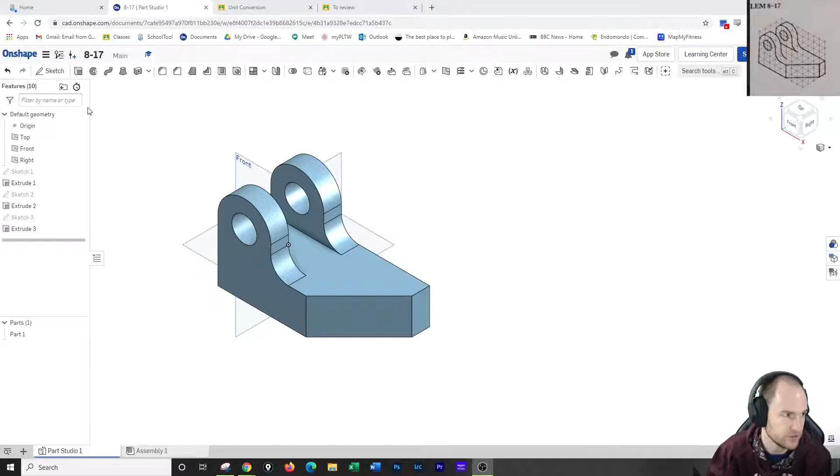Alright, so we're going to be drawing this guy, problem 8-17 in Onshape. So I'll just start by making a new Onshape document. This will be 8-17. And I'm going to do this in 3 extrusions. I'm going to start the first extrusion here. This is the most complicated one.

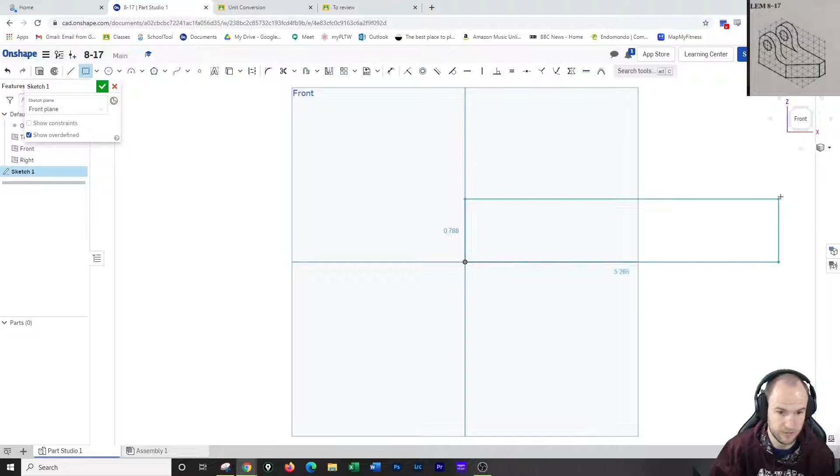And I'm going to be doing this based on the front view, which is going to be 1, 2, 3, 4, 5, 6, 7, 8. So looking up at that box, I've got an 8 by 2 section. If I'm looking at it here, so here it is. I got 1, 2, 3, 4, 5, 6, 7, 8. So that's an 8 by 2 section. So that's the part I drew.

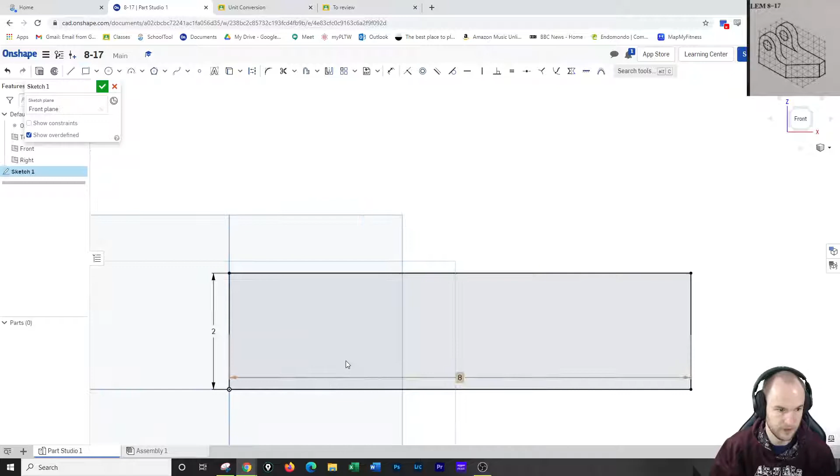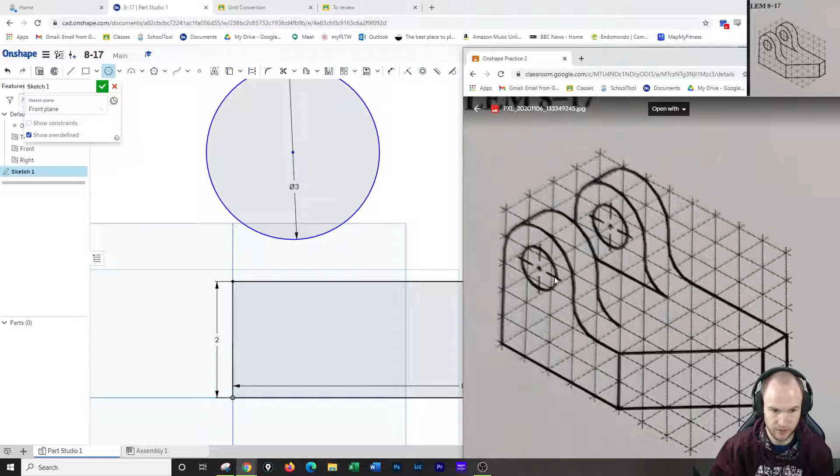The next step is I'm going to draw a circle with a 3-inch diameter. So here's my circle, and the diameter, if you look across the middle, is 1, 2, 3. So that's my 3-inch diameter. And it's going to be centered 1.5 up and 1.5 over from the edge. So when I go to dimension this, it's going to be 1.5 up, and it's going to be 1.5 over.

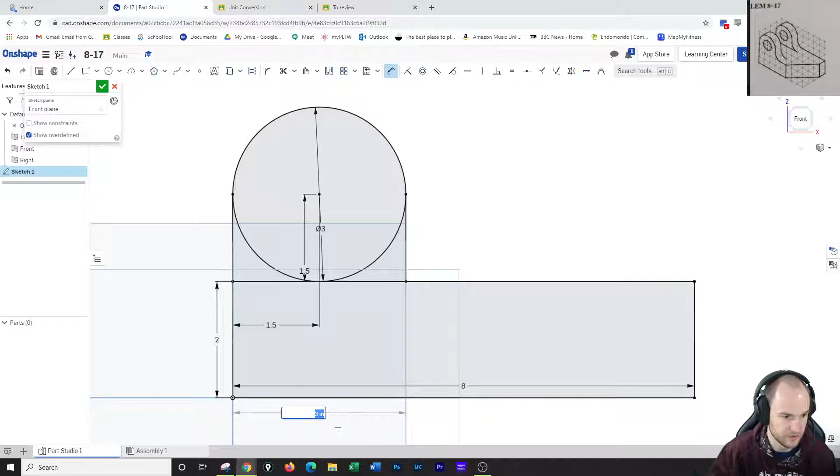I'm then going to take the line tool, and I'm going to grab onto the side of the circle and go straight down. And I'm going to do that on the other side as well. I'm going to go straight down. These lines should both be vertical, so making sure they're vertical with a vertical constraint. And these lines should be 3 inches apart. So I'm going to dimension them, make sure that they are 3 inches apart, which they are, so that's good.

Upon getting that, I can go in and I can trim the bottom of this circle out. So I use the trim tool for that. Oops, took out the top line. So I trimmed out the bottom of the circle, and now I have like a dome. And I am going to draw a circle in the middle. And actually, to figure out the dimension of this circle in the middle is kind of tricky. So it's not to any specific point, but it is hitting the corner of each of those squares.

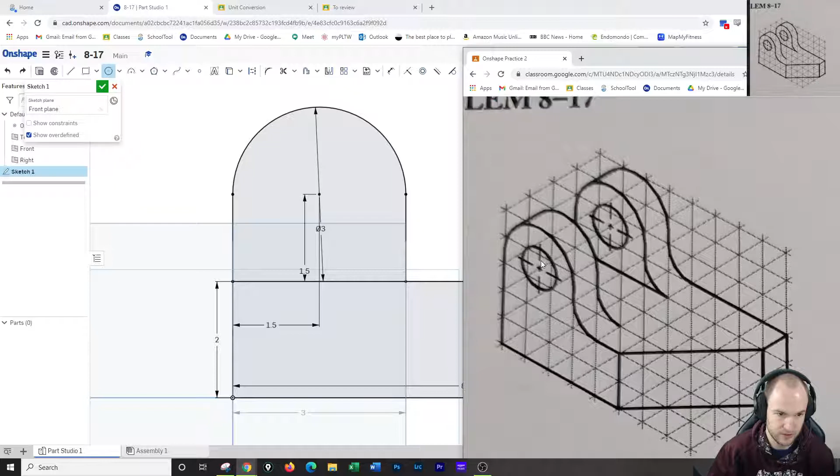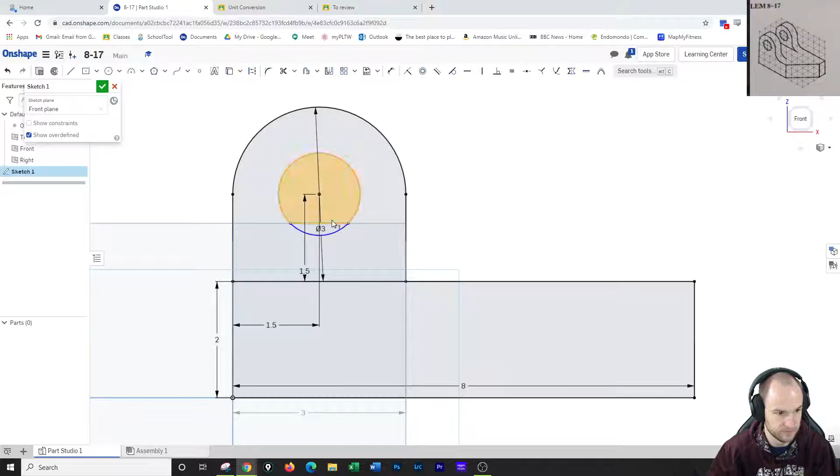So I can actually kind of cheat, and I can draw this 1 by 1 square and then draw the circle based on that. So to figure out the dimensions of this circle, I'm going to use a center point rectangle and make a 1 by 1 rectangle. And then I can make this circle and just drag it out till it hits one of the corners of the rectangle. And that will give me the dimension required for the circle. I can go in and delete the sacrificial rectangle here. And there we go. And the dimension of the circle is like 1.4 something. 1.414214. So that is there.

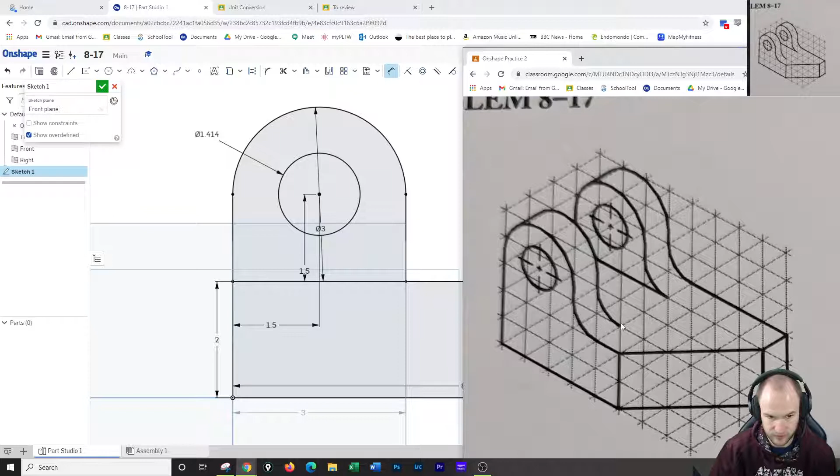The next thing I have to do, if I'm looking at this, is add this fillet here. So this fillet's got a radius of 1 whole block. It looks like if we kept going, it would go to 2 blocks and would make a circle here. So we got a fillet of 1 whole block. So I'm going to go in here. I'm going to use the sketch fillet. I could do this later, but I'm going to do it now. And between here and here is going to have a radius of 1. So that's good. Hit enter. And we've got our fillet in there.

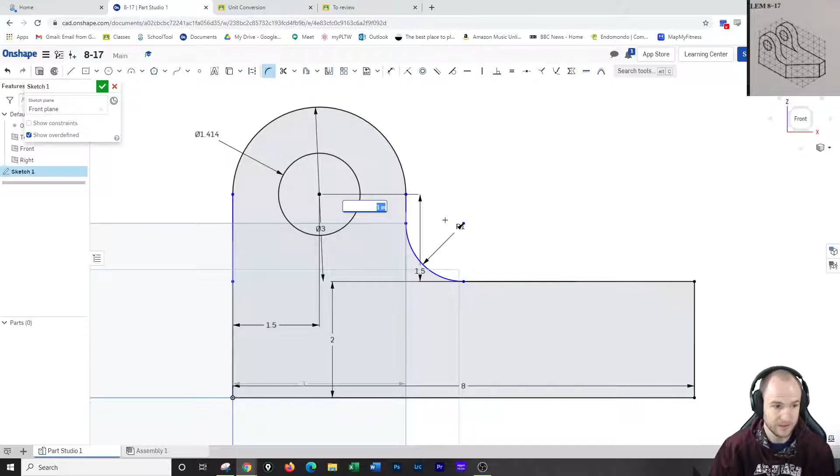And that's all I can do for this front sketch, so I'm going to hit finish sketch. I've already counted out how far I wish to extrude this. I wish to extrude it 4 inches, so I just want this section, leave the circle out, and it's going to extrude 4 inches. Like so.

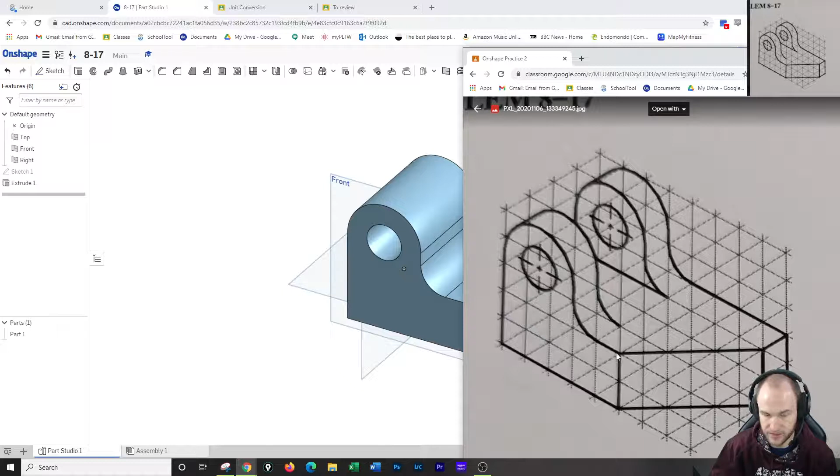Very good. The next part, I'm going to cut out the triangle portion here. And the triangle portion is 1 from this edge and 5 from this back edge. So that's where I'm getting my dimensions from. So I'm going to go to sketch, grab that top edge there, and I'm going to be sketching from here to here, and then just close it up so it is a closed shape I can extrude later. And I will be dimensioning from here to here is 1 inch. Very good. And from here to the back corner is 5.

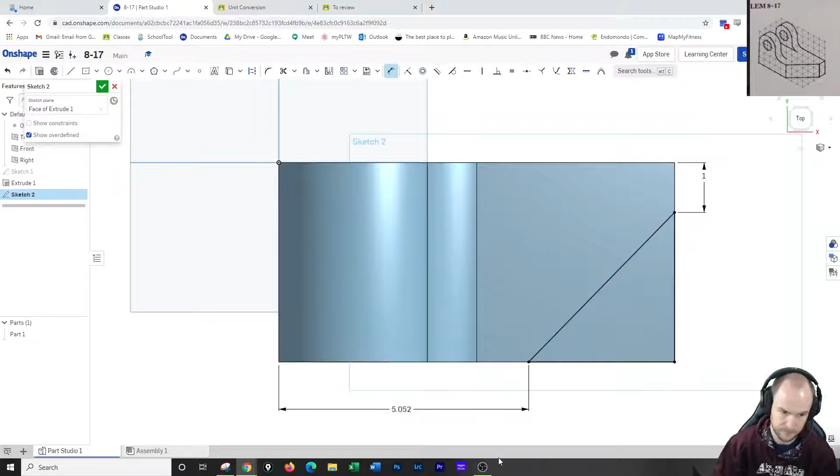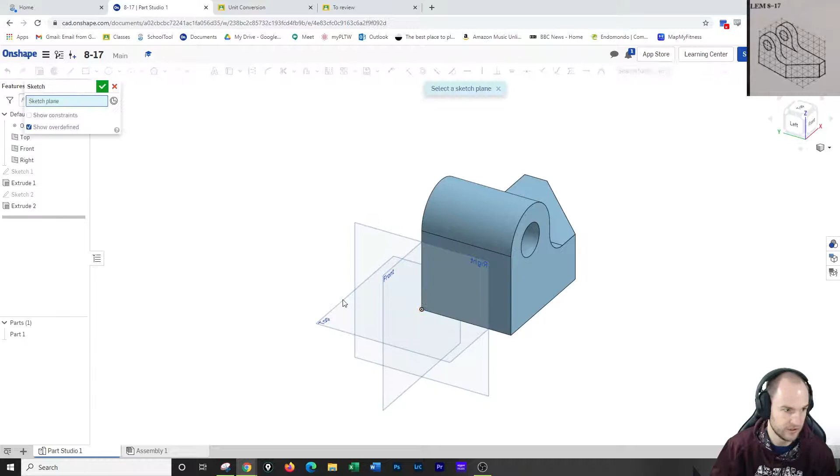Upon completing that, I can go back to my isometric view. It selects it automatically for me. If it didn't, grab it, and then I'm going to remove to a distance of through all. So there we go. The last section I got to do is I got to cut this ridge out. I'm going to do that on the back face. So I'm going to select the back face. I'm going to draw a corner rectangle like so.

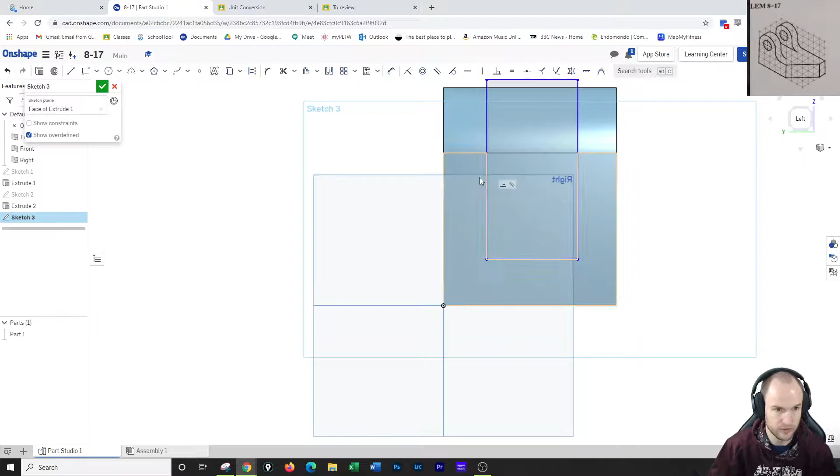And if we look at our shape, it is 2 wide and it starts at the top of the rectangle from the beginning. So it starts 2 from the bottom and it is 1 from each edge. So this is unimportant right now. I want this to be 2. I want it to be 1 from one of the edges, which will take care of how far it is from the other edge. And I want it to be 2 from the bottom. So it's 2 from the bottom now.

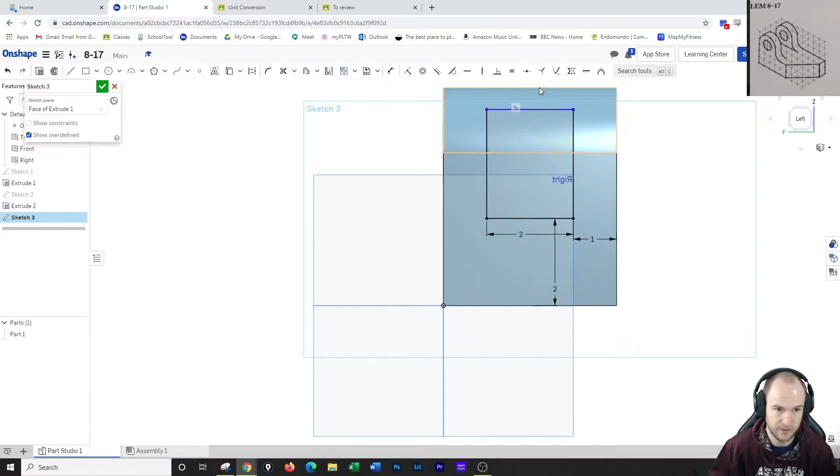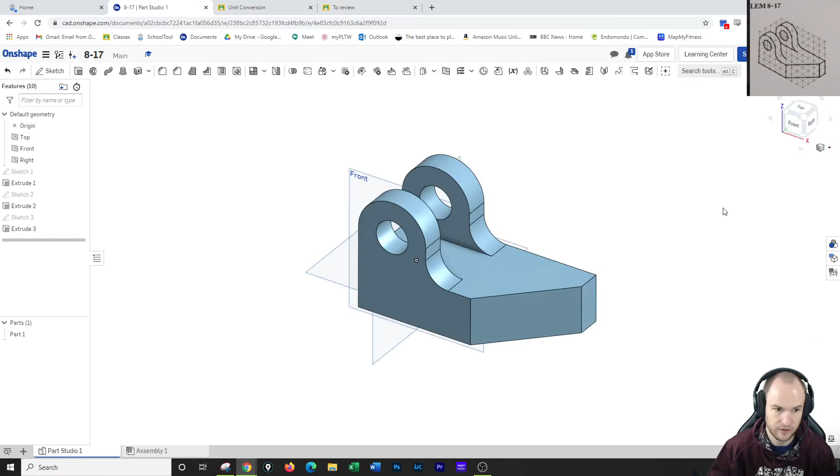And as long as it's extending over the top edge, you're good. If for some reason it was below the top edge like that, you can just grab it and drag it above. As long as it's above that top edge, it'll do what we want it to do. So I am going to go to finish sketch and I'm going to extrude. I'm going to grab both sections. I'm going to hit remove and tell it to remove through all. Upon doing so, we are all set with this shape and it should look relatively similar to that shape. So that is how you draw 8-17.